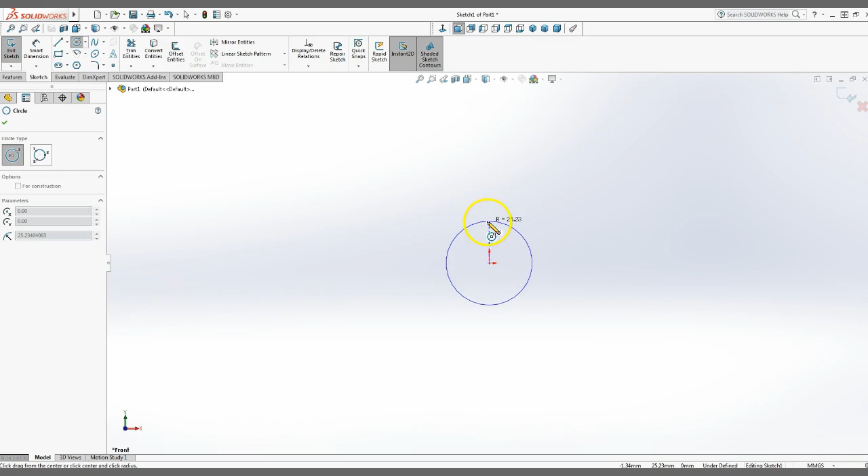So I've got my part file in millimeters, and I'm going to do the sketch on the front plane, tackling that Y-shaped view first. That's where I'm going to get started. Now you'll see I have a fully defined sketch, which is where we want to be.

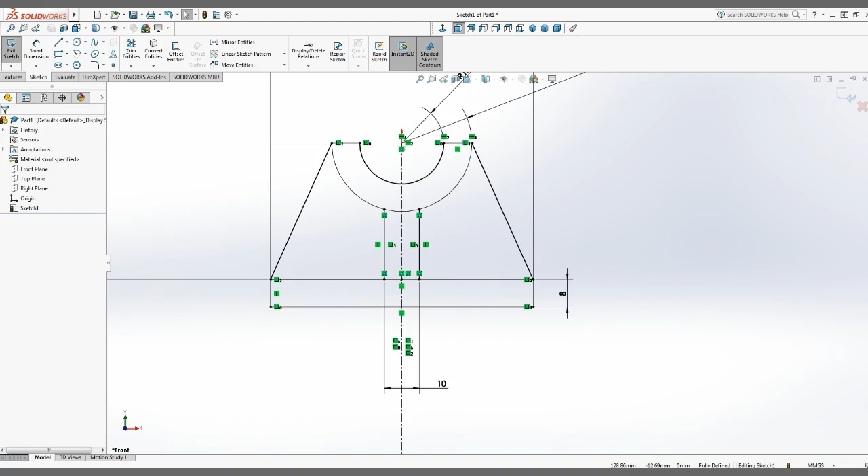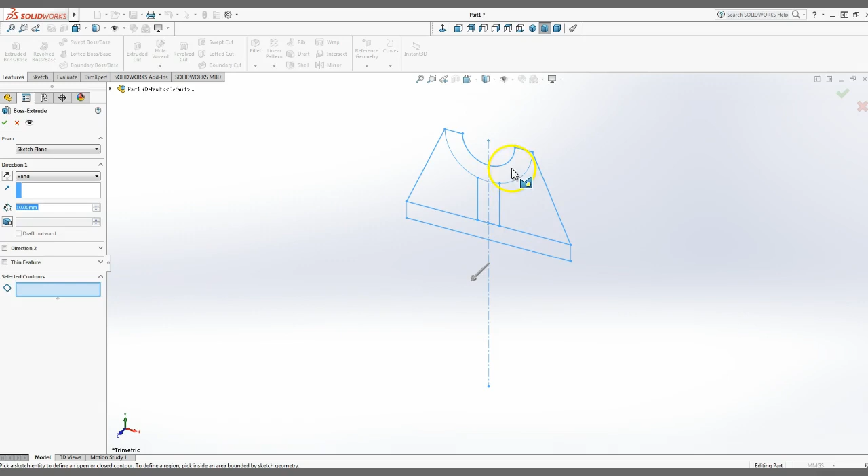Next, I'm going to take those parts and pieces and start to extrude them now that I've got my flat shape. I'll exit my sketch, come over to the Features tab, and choose Extrude Boss Base. It needs to know which parts I want to extrude, so I need to figure out what to tackle first. I'm going to do the Y-shaped part, so I'll click those parts and pieces that create that.

Let's look at it - looks much better. I'm going to go back into that edit feature and edit the Boss Extrude so you guys can see what my different options are.

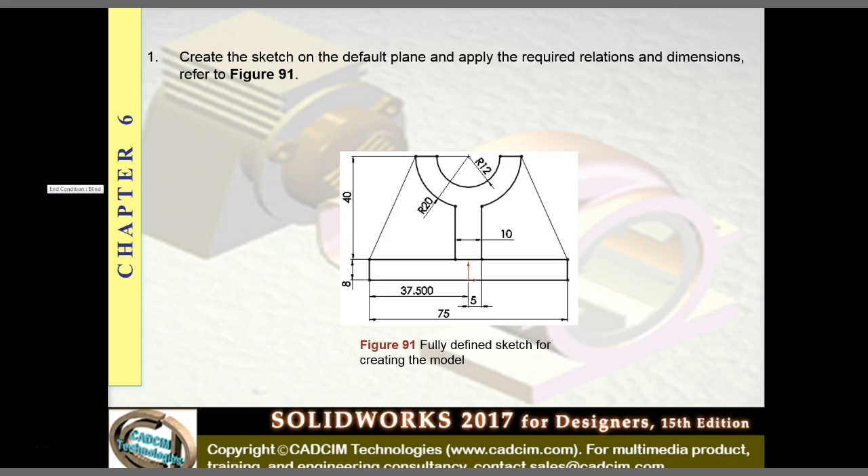So you have to understand where my sketch plane is - I started drawing on the front plane. If we look up here, you can see where all those planes exist out in space. I told it to go in a blind direction, but looking at my drawing, maybe what I really want to do is bring in, let's go back for a second so we can see these pieces right here. I'm going to have to draw those, and those will extrude a little differently.

I've got this Y shape here I'm working on, and then I've got that piece down at the bottom. So maybe my better option, rather than a blind extrude, is to do a mid-plane extrude and tell it to go so far in each direction of the plane. If you look at that Y shape, you can see its dimension and how far it's extruded by looking back at your drawing here.

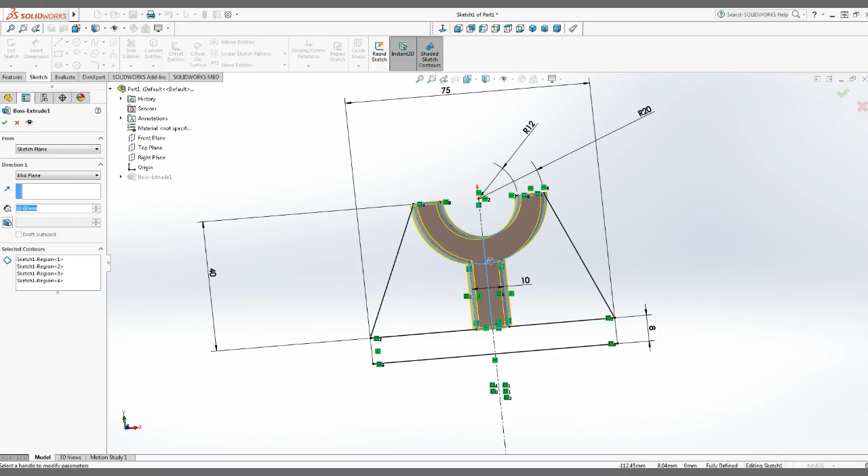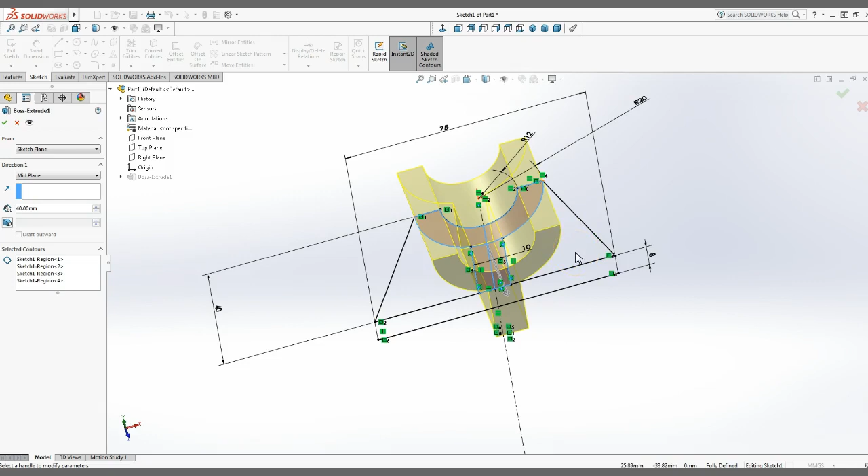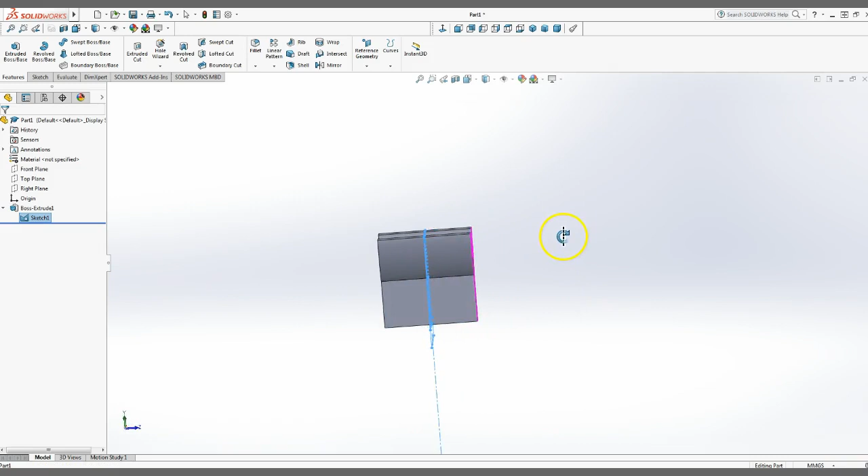So I'm going to go ahead and choose that. You see our sketch is there, and if we want to show the sketch, you can click this eyeball button to turn it on. We might want to do that so we can see the rest of that sketch. You can see that sketch lives there in the middle of our Extruded Boss Base feature.

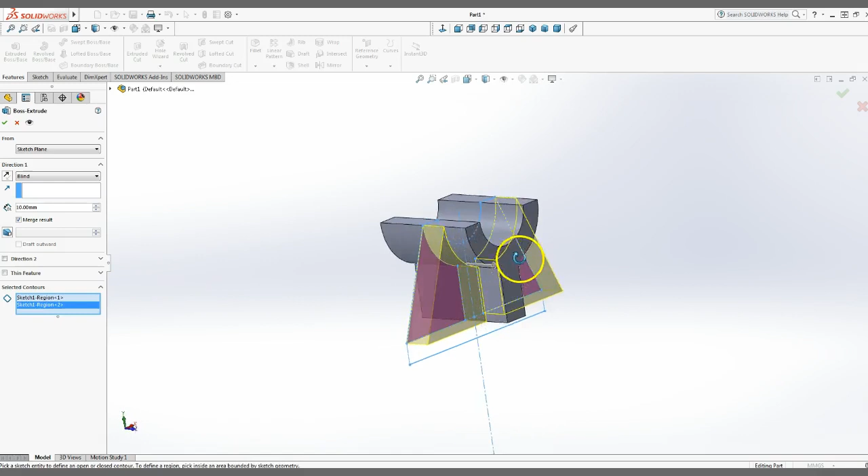Alright, so I'm going to go to Extrude Boss Base. Actually, before I click that, I'm going to click on Sketch 1 and highlight the sketch. Now I'm going to do Extrude Boss Base, click there, and since this one's going to have the same dimension, I'll click over here as well. So you can see we're talking about those triangular shaped pieces, those angled pieces.

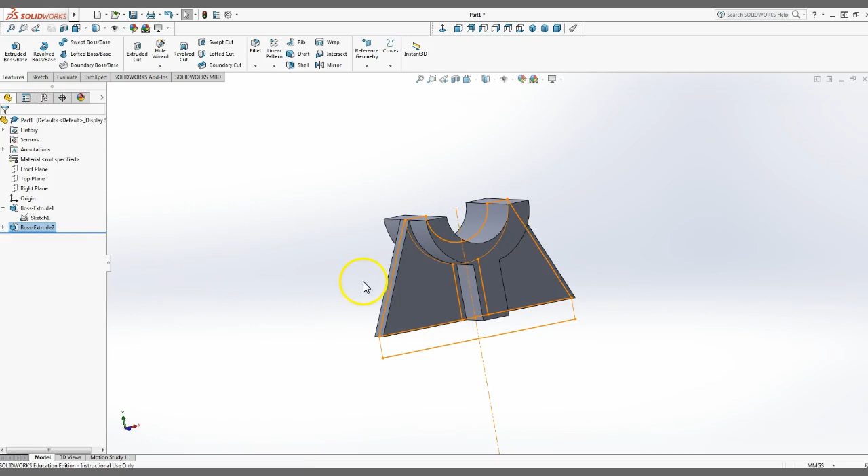For this one, I also need to have it as mid-plane, and if we look back at our drawing, you'll see its depth is 8, so that's going to be my extrusion depth there. Okay, so we're getting closer - that sketch still lives there on the front plane, and we've put a mid-plane extrusion to it.

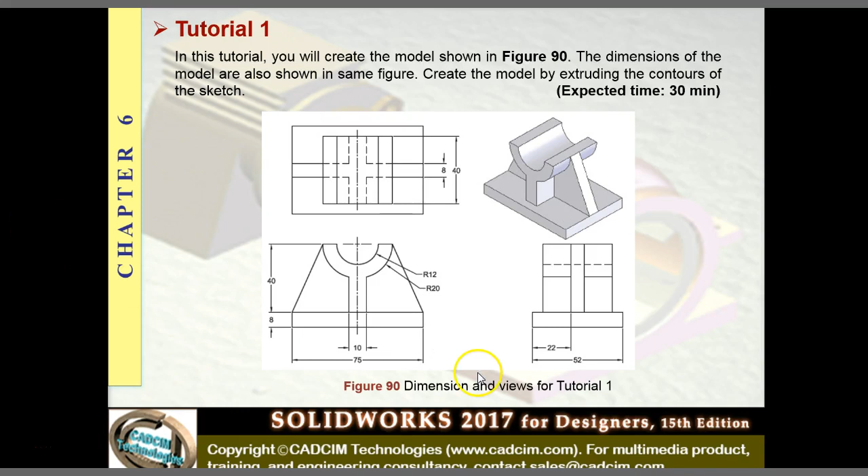So I'm going to do one more Extrude Boss Base. I'll highlight the sketch first over on the left so I've got it selected, then choose Extrude Boss Base, and now we're going to do the bottom feature here. I'll click down there twice. It's going to be a mid-plane as well, and if you look out here, the overall distance is 52.

And so now you'll see we have a finished product. If we want to take this sketch and turn it off, we can hit the little hide button over here, and now our model matches what's there.